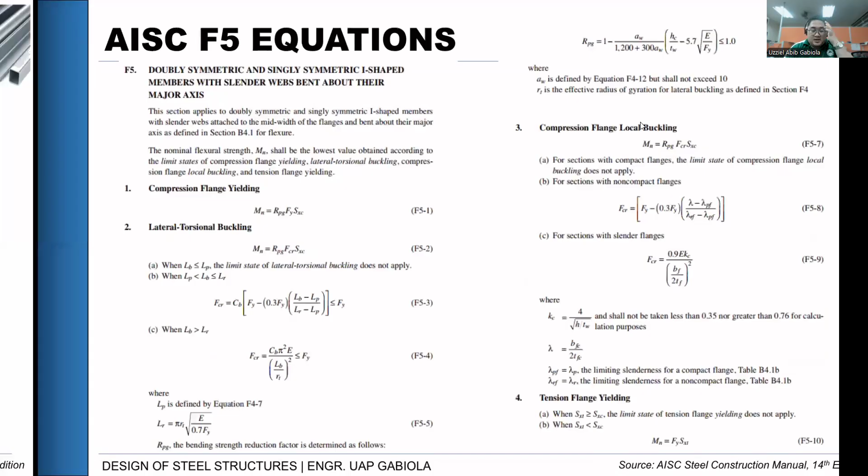When this happens, the code assumes, in the equations we made for F2, F3, and F5, that the moment diagram is constant in value. It means it's not variable - the moment diagram is uniform. For example, if you have a moment diagram, the assumption is it looks like this - straight, which is not the case whenever we have a loading.

For example, if we have a concentrated load at the center, we know the moment diagram is triangular. Or if the loading becomes a uniformly distributed load, we know the moment diagram is a parabola - it's parabolic. So it's not uniform.

So if the moment is not uniform, the beam may have higher buckling strength. To accommodate this increase in buckling strength in the moment capacity, we'll notice that the values in our code have a multiplier here called CB - this is our moment magnifier that we'll use.

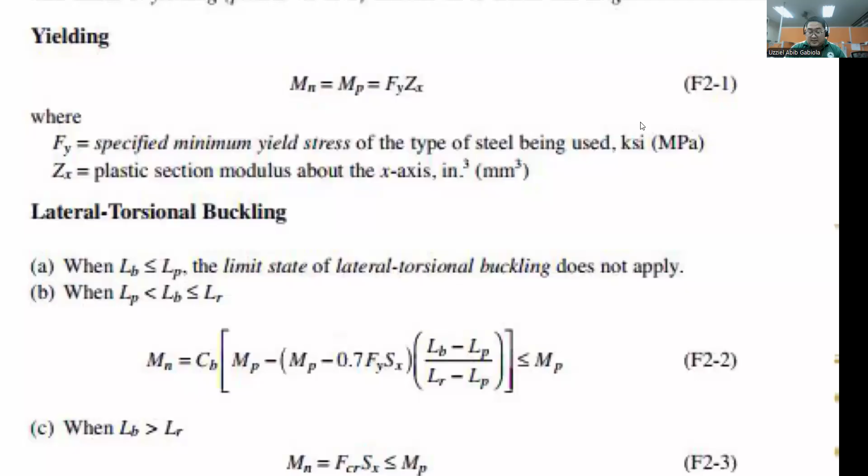So far, in our previous examples, we assumed CB equals 1. But actually, we have to calculate that based on the value of our moment diagram. This is also the value of CB - meaning we amplify our capacity, we increase it.

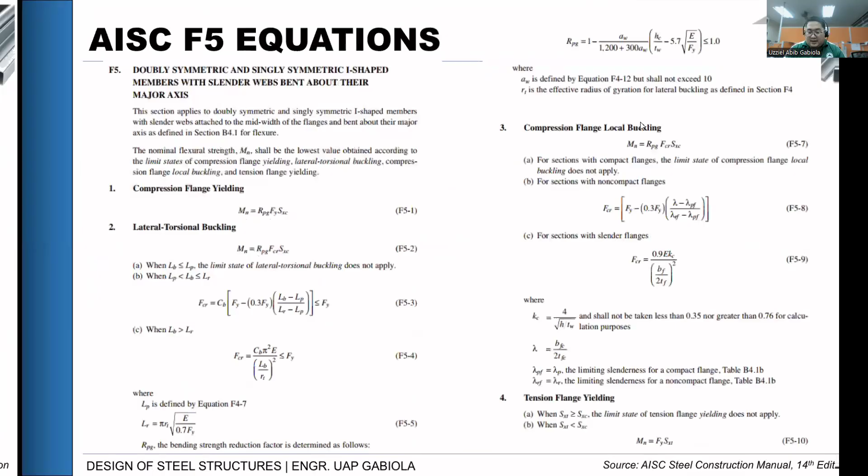So if that is the case, the code says to adjust for moment variation, we use the moment gradient modifier, CB.

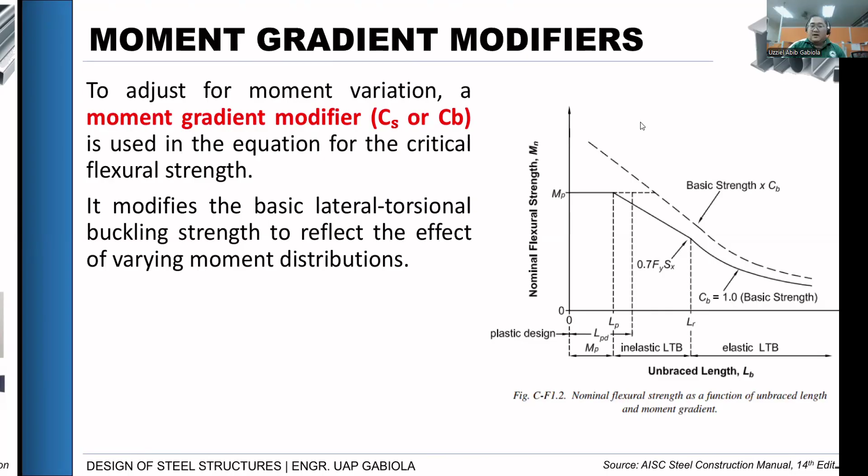Okay, so the equation for critical flexural strength - we modify our basic lateral torsional buckling strength to reflect the effect of varying moment distribution. According to the code, they adapted the formula of Kirby and Nethercot from 1979, which they modified, and this is the formula they used for CB.

So CB equals 12.5 times maximum moment, all over 2.5 times maximum moment plus 3 MA plus 4 MB plus 3 MC. These are our values, wherein MA, MB, and MC are the quarter points of our unbraced length.

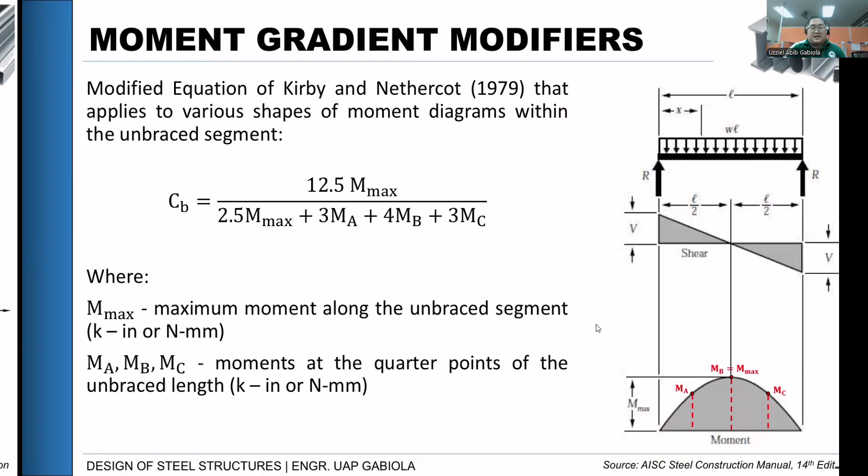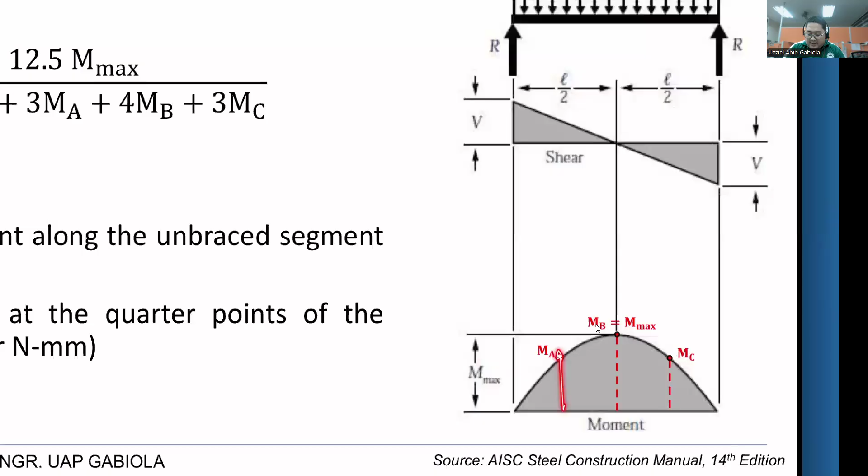So when we say quarter points, let's say this is our beam. Our assumption, for example, is that the bracing is at the support. This means our unbraced length is the full length of the beam. If that's the case, looking at our moment diagram, the positions of MA, MB, and MC are the quarter points - dividing our unbraced length by 4 gives us the points of MA, MB, and MC that we'll use in this equation.

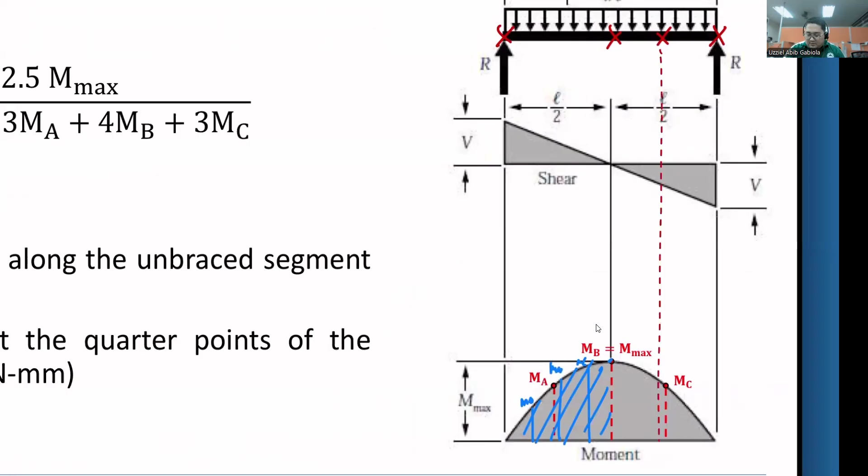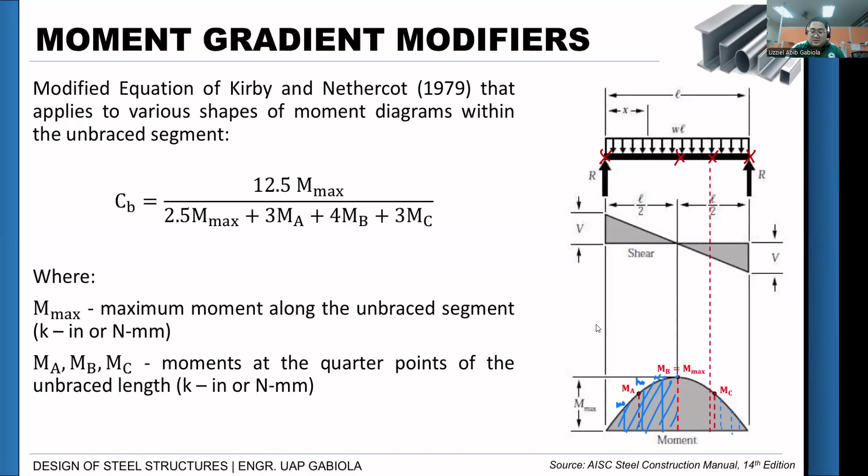So this becomes the new MA, MB, MC, and the maximum is whatever the maximum value is. So it depends on the unbraced length what becomes the position of MA, MB, MC, and the maximum moment, as long as they are the quarter points of our moment diagram.

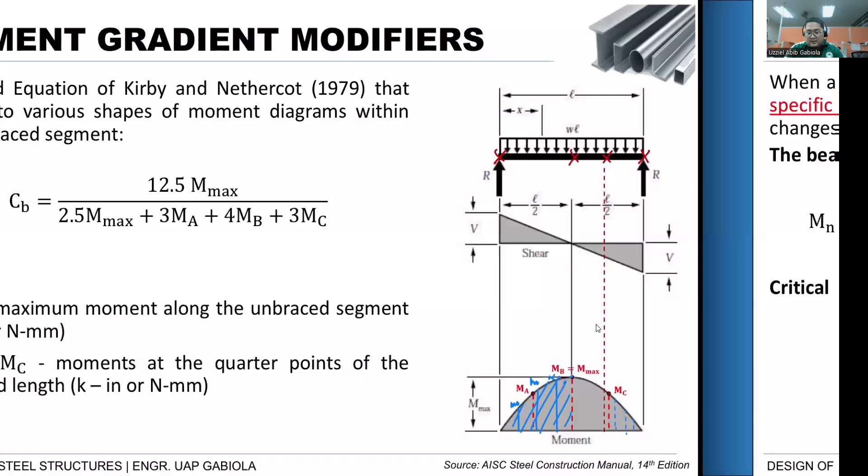Quarter points of the unbraced length that we're looking at in our moment diagram. So when steel beams are discretely braced, it means the bracing is only at certain points - lateral torsional buckling is restricted at specific locations along its length rather than continuously along the entire span.

So now the beam resisting bending changes, and the distribution of stresses along our length changes. For our beam capacity, it depends on our unbraced length. First, our capacity is based on our plastic moment. And second, we compare it with our critical buckling moment - this is the amplifier we discussed, the critical moment that exists in our beam based on our unbraced length.

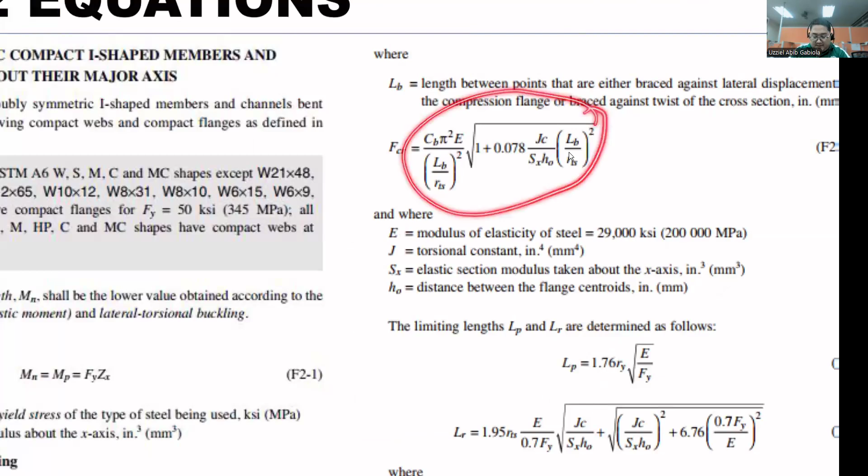Going back to our column discussion, remember when we were dealing with columns, we plotted and looked at the limit of 4.71 square root of E over Fy to know whether our buckling is inelastic or elastic. So for beams, we have something similar to check whether our lateral torsional buckling is inelastic, elastic, or fully plastic.

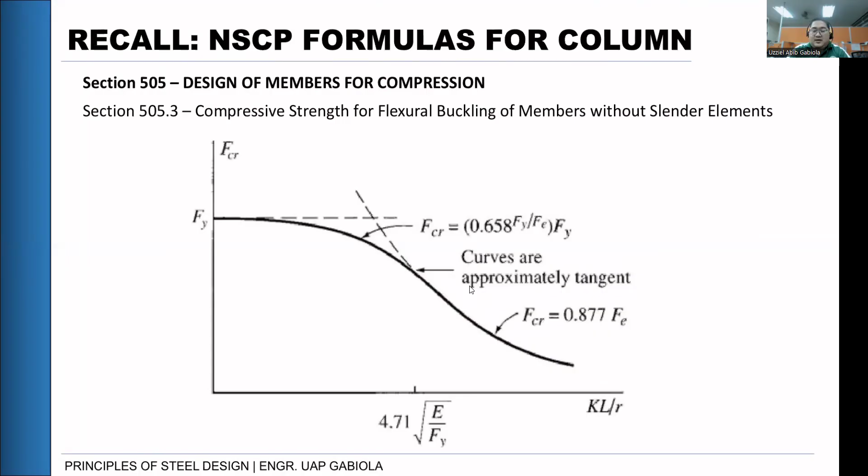Our limit now is divided into three zones - zone 1, zone 2, and zone 3. The limiting points are LP and LR, values that are already in the code. Let's explain our zoning.

For zone 1, when our lateral torsional buckling or unbraced length is less than LP, we're in zone 1, and full plastic moment is our condition - our moment equals our plastic moment.

And then when it's in between LP and LR, we're in zone 2 - inelastic lateral torsional buckling. So the formula depends on the interpolated value between the plastic moment and the critical moment. We have a slope called BF here. We reduce the capacity because we're now within the inelastic range of lateral torsional buckling - meaning it can no longer achieve the plastic moment, MP.

And then we have zone 3, when our unbraced length is greater than LR - this is elastic, and it has its own formula.

So with zone 1, zone 2, and zone 3, we need to determine the value of LP and LR. These are the equations we'll use - already given in the code you have. All we do is substitute values based on table 1-1.

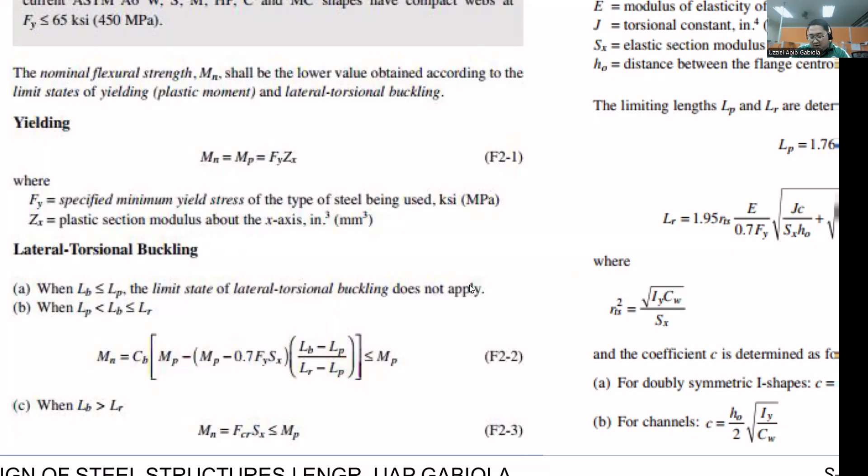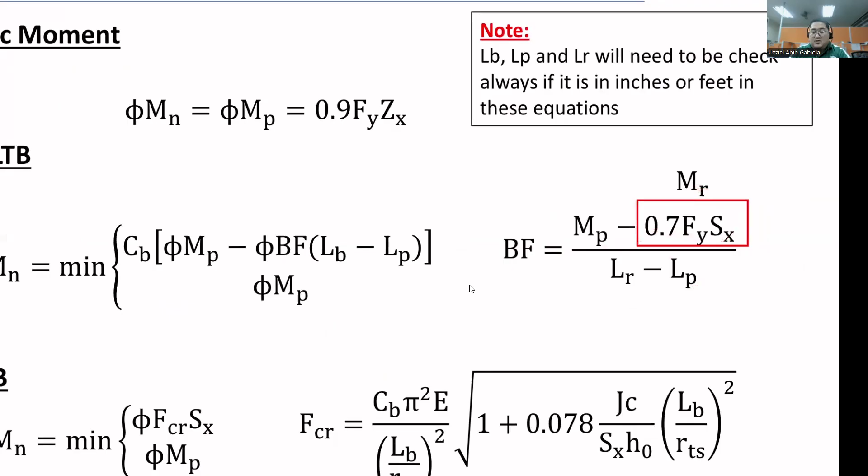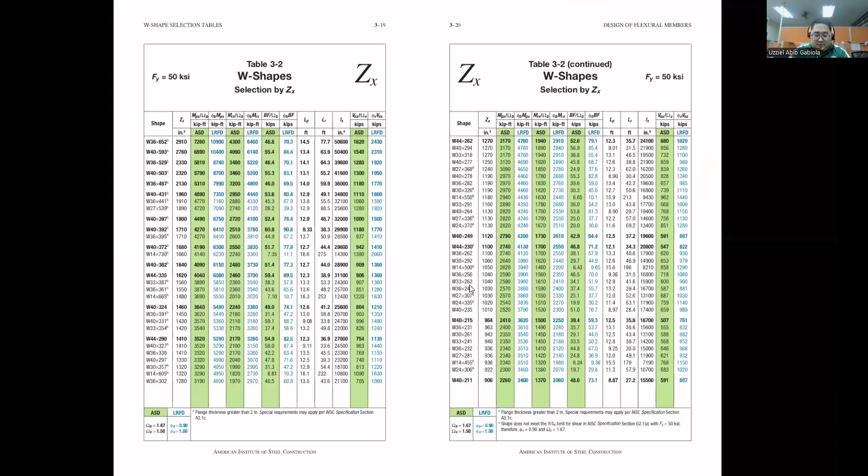Why do we need to introduce this new variable? Because if we check the table we'll use, table 3-2, this table is arranged by ZX for our W-shape section. You'll see the first two values are for moment - this is the value of our moment, and this is the value of MR, which is taken from 0.7 FYSX.

That's MR - that's the value. And this BF here is also that value shown in the table. So if your FY is equal to 50 KSI, we can utilize this table directly - you don't need to calculate everything one by one like before, item by item. It's the same for our LP and LR.

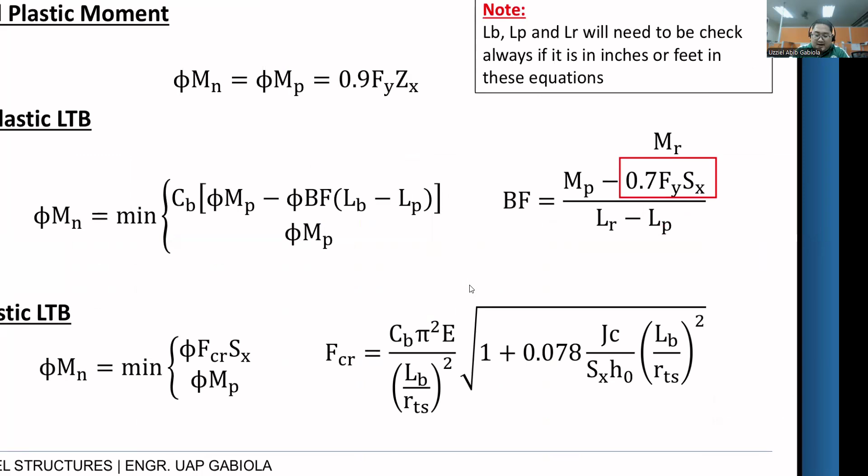Meron din ditong LP and LR. You don't need to calculate it manually, unless sa direction ng exam ay to verify. Pero kung halimbawa wala namang binigay sa exam na you need to calculate manually yung LP and LR, you can use it directly, galing sa table, as long as yung FY mo ay 50 KSI.

So other values of FY, unfortunately, you need to calculate it one by one. Dito makikita mo, meron na din siyang value ng shear, so para doon sa pag-check ng shear capacity ng section, wala ka ng problema din. Kaya sabi ko nga, more or less, yung pagkuha nitong values na to, substitution lang siya ng formula. So, kaya yun yung condition for zone 2.

At then for zone 3, ito naman daw yung equation. phi FCR SX, wherein FCR natin is itong mahabang equation na to, na we can also manually calculate, as long as we know the value of our properties ng section.

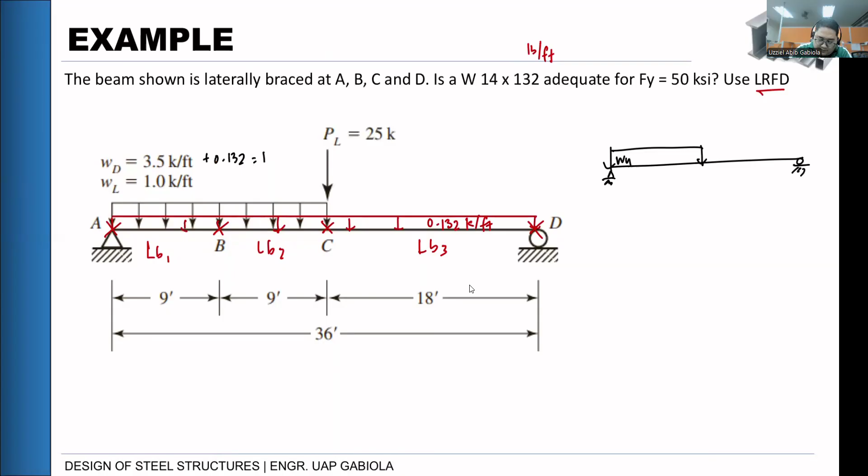And kip per foot, and equals to 3.632 kip per foot na siya. So para makuha natin yung ultimate load, dito, 1.2 times 1.6 lang. Kunin lang natin yun, WU is 1.2 WD plus 1.6 ng WL. So, 1.2 times 3.632, 1.6 times 1, that is 5.9584.

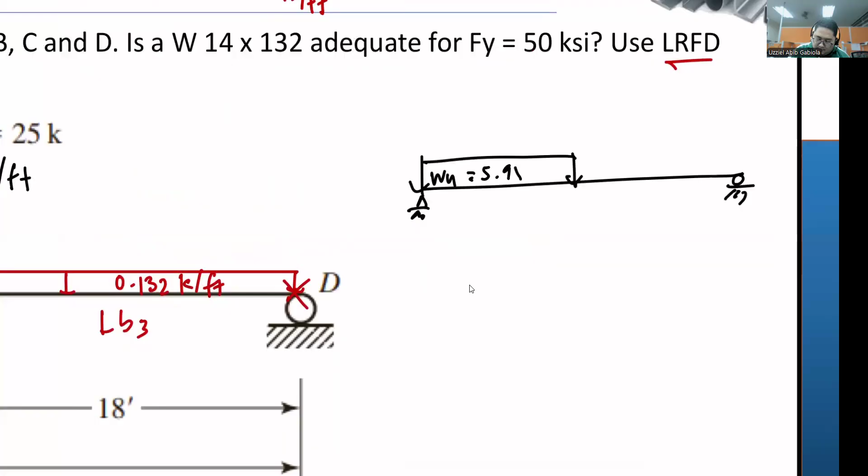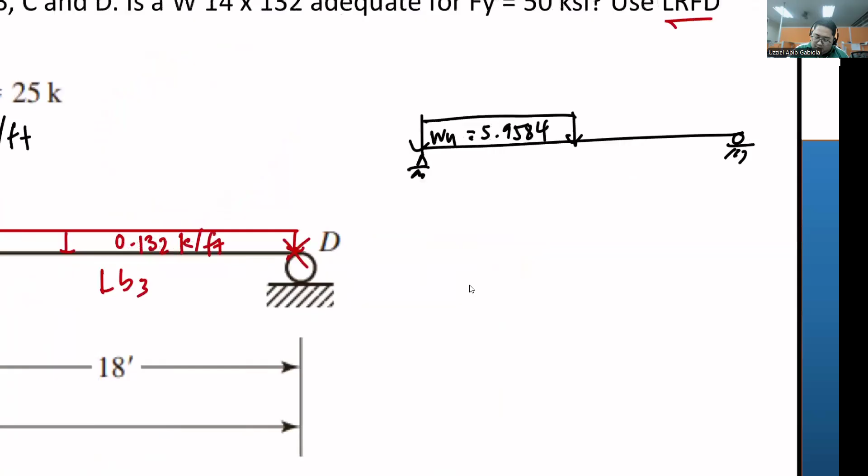Okay, and then we also have here an applied live load na concentrated. So, kung si live load, 1.6 lang yon times 25, so that is 40. Lagay natin dito, 40, meron tayong 40 kips dito. And then, meron tayong remaining na uniformly distributed load dito sa rest ng section natin, which is 0.132. So, lagyan na lang natin dito, 0.132 kip per foot.

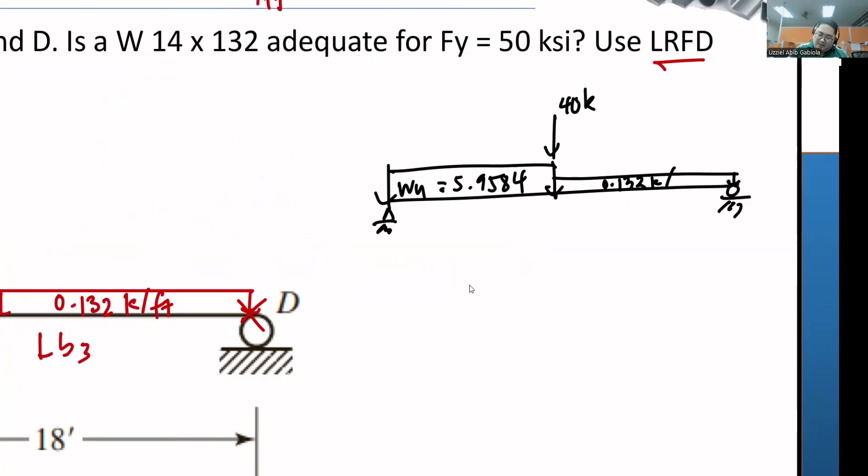Okay, so kailangan i-solve natin ngayon yung ultimate moment natin dito sa beam natin. Since factored na yung loadings natin, we can calculate now the value of our ultimate moment based on LRFD. So first is to get our reaction. This is A, this is D. So RA and RD, okay, so performing...

Ganyan yung bracing natin, lagay ko lang yung mga bracing natin. So this is 9, 9, 18. Una is to change yung ating mga uniform distributed load into its equivalent ECL. So 5.9584 times 18, that is 107.2512 kips. 0.132 times 18, that is 2.376.

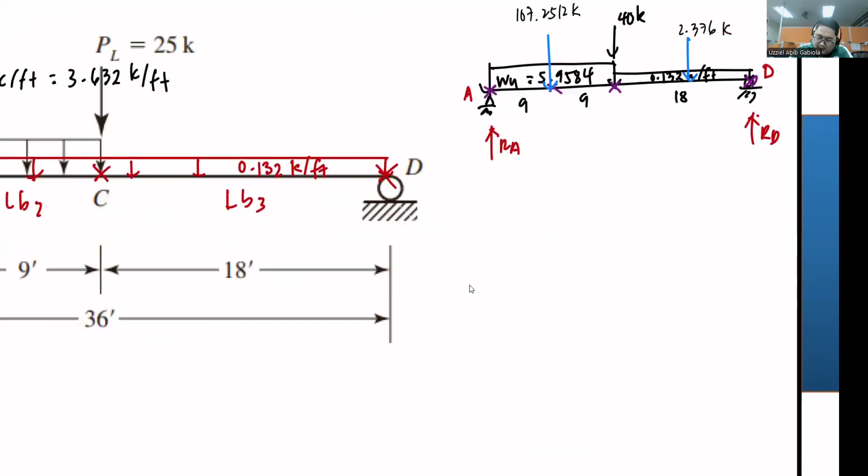Okay, kips. So to get the value of RD, we do this: summation of moment at A is equal to 0. Let's take our table. So these three loadings rotate clockwise, and RD rotates counterclockwise.

So that is 107.2512 times 9, 40 times 18, plus 2.376 times 27, on the other side that is 36 times RD. So in total, we can get RD equals.

107.2512 times 9, 40 times 18, 2.376 times 27, divide by 36, that is 48.5948 kips. Then using summation of forces Y equals 0: all downward forces minus RD gives us RA. That's 107.2512 plus 40 plus 2.376 minus 48, which is 101.0324 kips. That's the value of RD and RA.

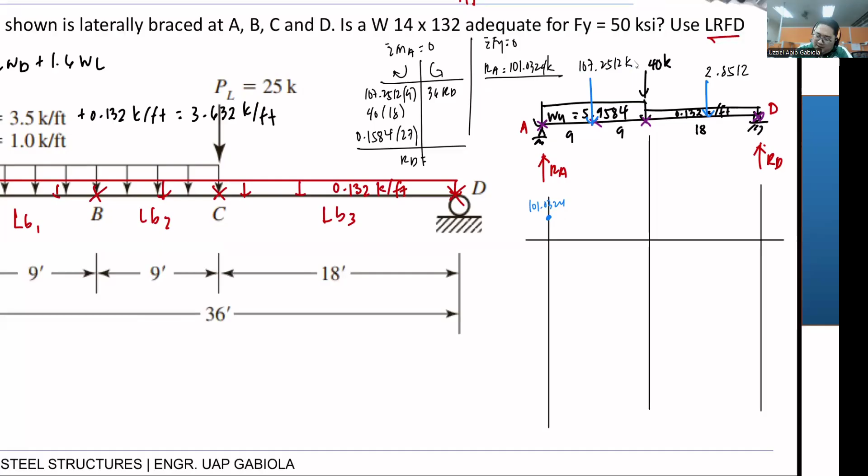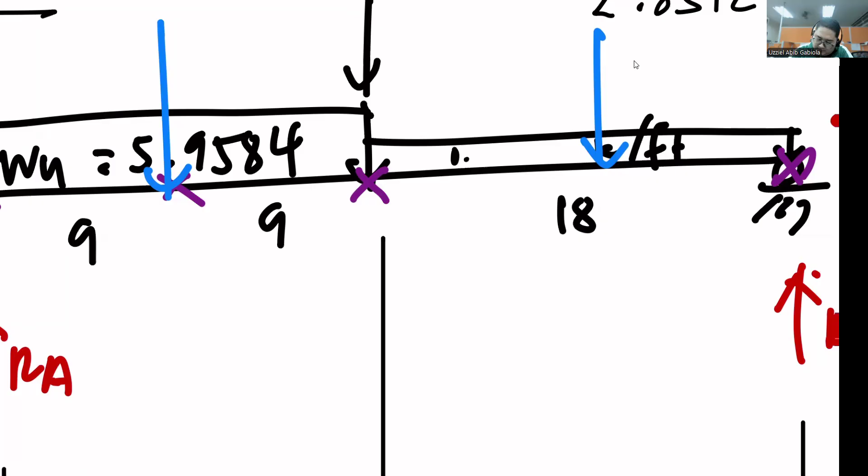So this becomes 2.8512 kips. It won't be 0.132. It's 0.132 times 1.2, equals 0.1584.

So RD: 107.2512 times 9, 40 times 18, 2.8512 times 27, divide by 36, that gives 48.9512. So 107.2512 plus 40 plus 2.8512 minus RD equals 101.1512 K. Let's adjust this too.

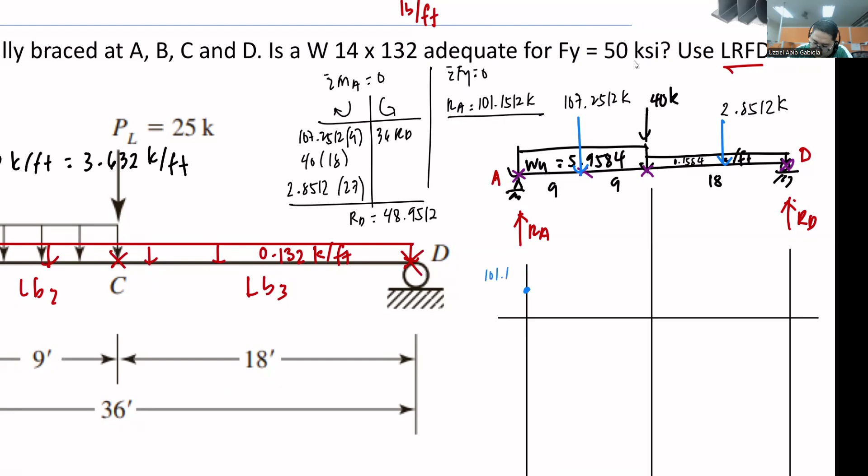That is 101.1512, minus 107.2512, that's negative 6.1. Then there's 40 going down, so our value goes down to negative 46.1. Then there's another uniform distributed load.

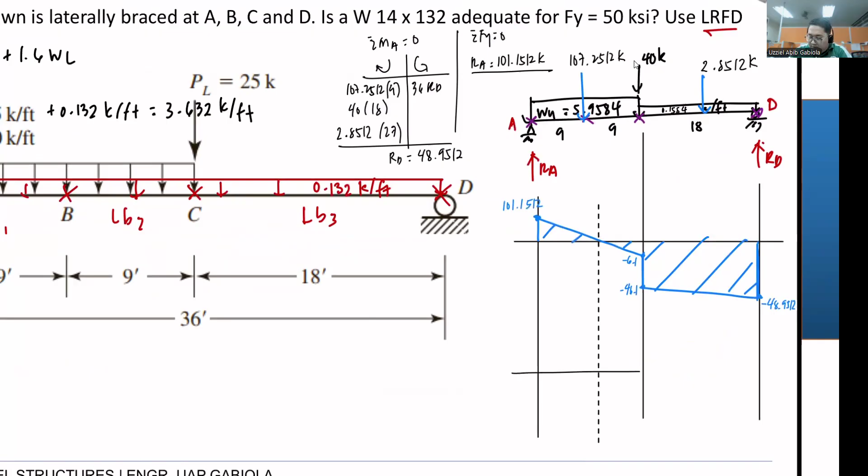From our shear diagram, we can now calculate our moment diagram. Wherever the point of zero shear is, that's usually where our maximum moment is located. So we need to calculate the value of that distance by dividing the intensity by our loading to get that distance, let's call it x.

101.1512 divided by 5.9584, that is 16.976. So the remaining part, we just subtract from 18, giving 1.024. For the moment, just get the area of our shapes.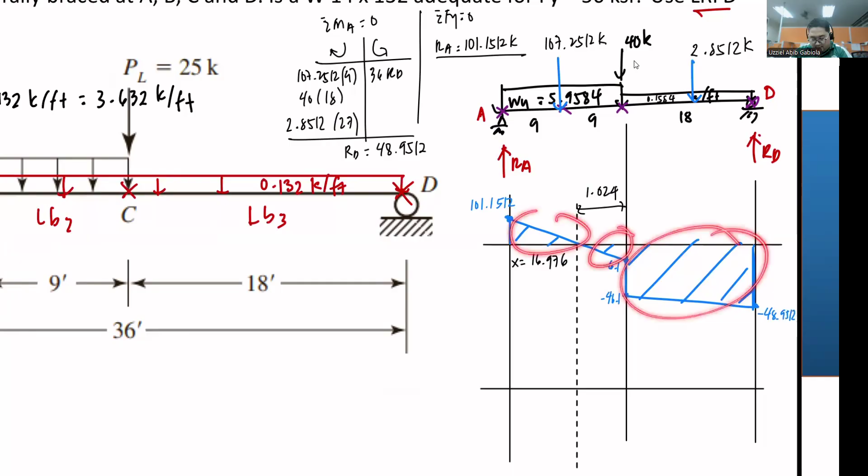We have a triangle and then we have a trapezoidal shape. First, 0.5 of 101.1512 times 16.976, that is 858.571.

And then the bottom triangle: negative 0.5, negative 6.1 times 1.024, is 855.448. Then minus our trapezoid: 0.5 times negative 46.1 plus negative 48.9512, times 18 as the length, that is 0 - well, there's a slight discrepancy but it's basically 0.

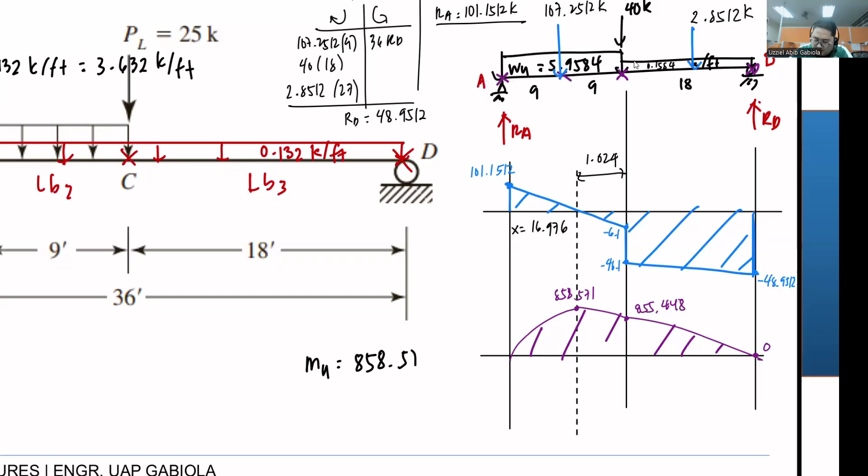So this will be parabolic, this is also parabolic. So this is our moment diagram. And as you can see on the diagram, our maximum moment, MU, is 858.571 kip-ft. That means this is what our section needs to resist - we'll check that later. But so far we've only done structural analysis; we haven't analyzed our section yet.

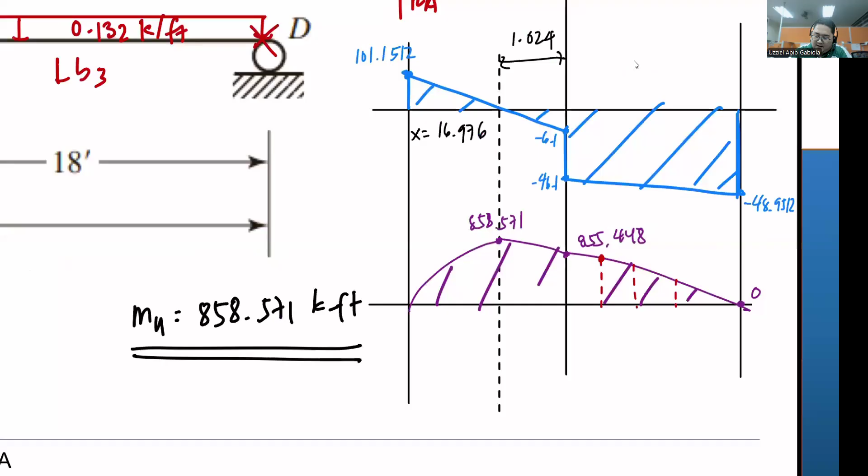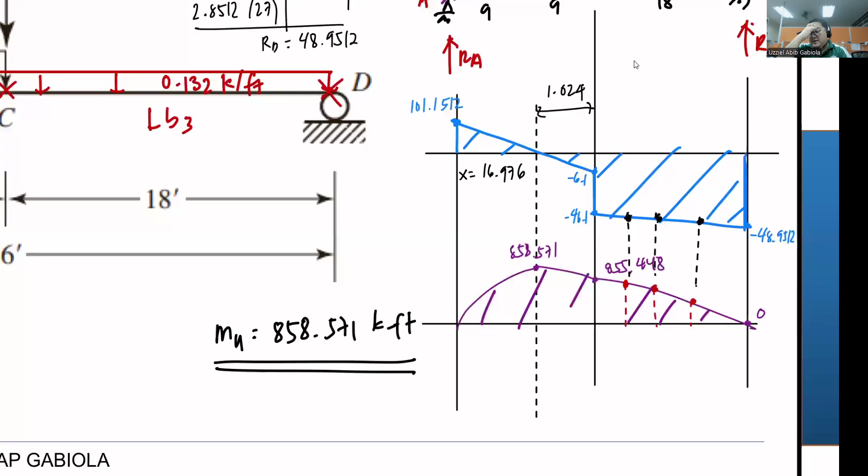So now the question is, how do we get the values of those points? There are several ways. You could get the equivalent points and calculate the value, but that's very tedious since you'd need to do ratio and proportion. So one way is, since we're dealing with a moment diagram - values of moments - and we know the distances, since we divided this segment by 4, this portion can be taken as 18 divided by 4, which is 4.5.

Okay, so pwede sabihin natin, mula sa right support, this is 4.5, this is 9.0, this is 13.5 para makuha natin yung value ng MA, MB, at MC. So okay lang mag-interchange si MA at si MB, MC rather. And ang maximum natin, wala namang ibang malaki diyan kundi yung 855, itong point na ito.

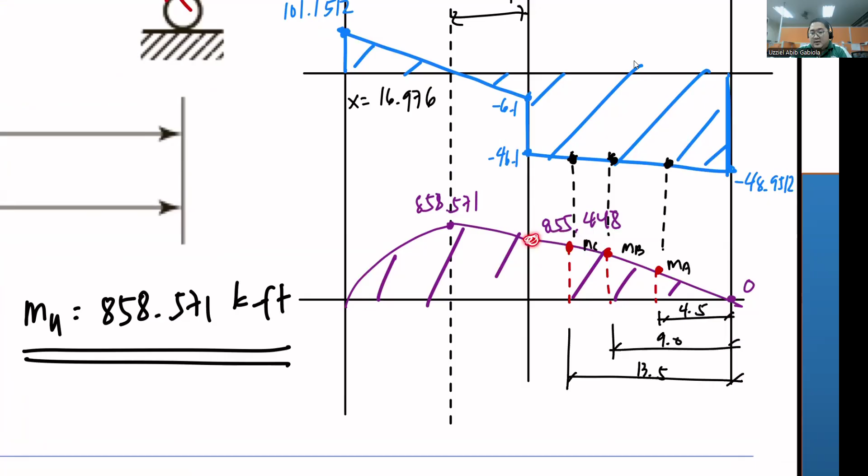So para makuha yon, what we can do is to cut section. Cut tayo ng section, and then isolate natin yung section na yun para ma-expose yung internal forces niya. Kunin natin yung moment function ng segment na yun.

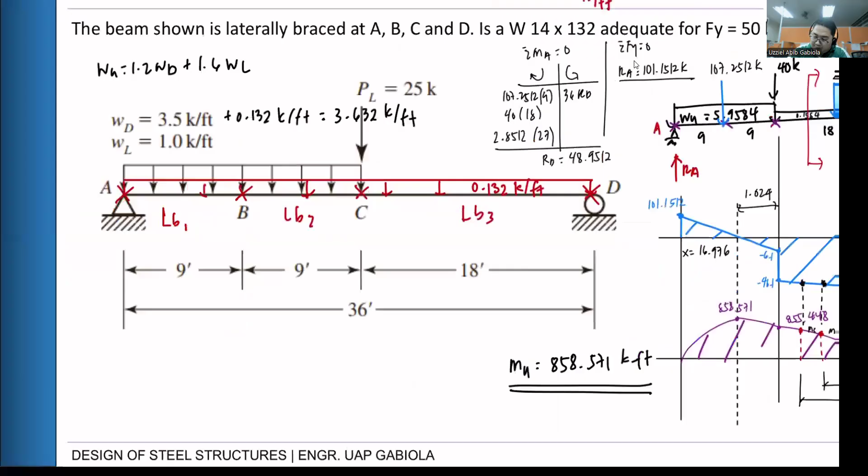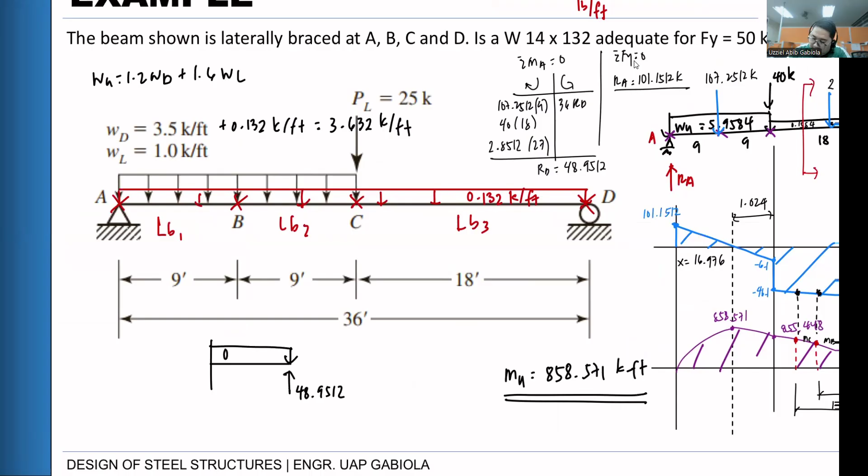Yung segment natin, meron siyang RD na 48.9512. Ito yung ating cut section. Meron siyang uniformly distributed dito na 0.1584. Okay, so ito yung point O, yung cut natin. So referring sa distance from the left end, ito yung distance natin, pwede tawagin ito as X. And kunin natin yung kanyang moment function using that diagram.

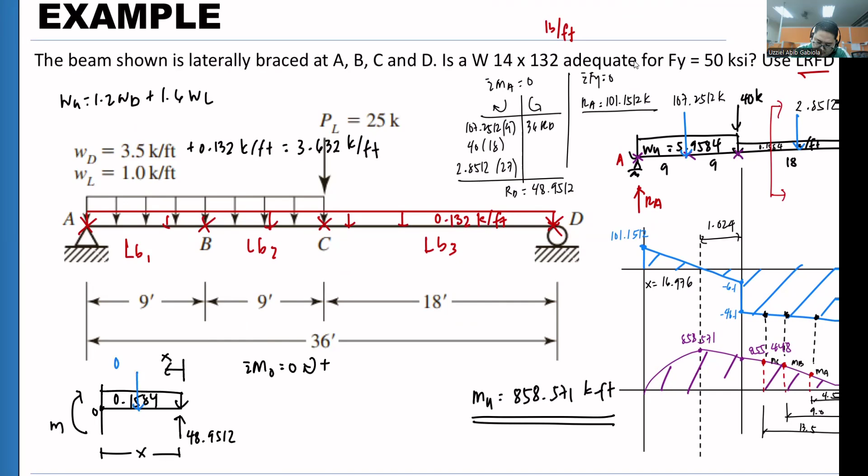Taking summation of moments at O equals 0, taking clockwise as positive. So magro-rotate itong ECL natin. This is 0.1584x. So that is M plus 0.1584x times x over 2, minus 48.9512x equals 0. So yung moment function natin is 48.9512x minus 0.1584x squared over 2.

Itong moment function na ito ay referring sa moment equation na ito. Okay, so kung gusto natin makuha yung mga value ng moments na yun, we can substitute yung 4.5, yung 9, tsaka 13.5 dito sa equation na ito. Okay, so doing that...

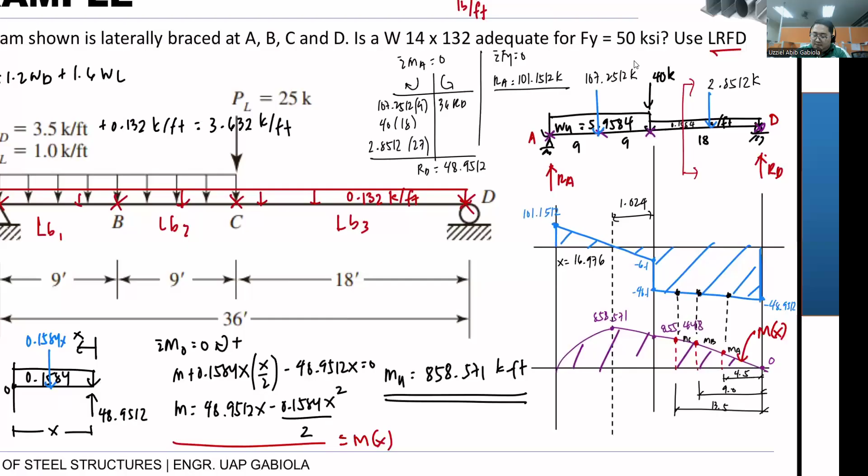Let's proceed sa another sheet. Okay so, using yung ano natin, copy natin ito, moment: 48.9512x minus 0.1584x squared over 2.

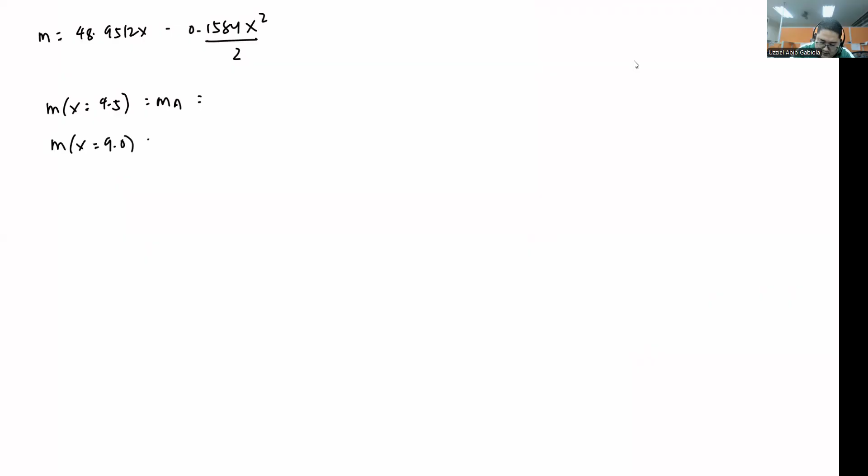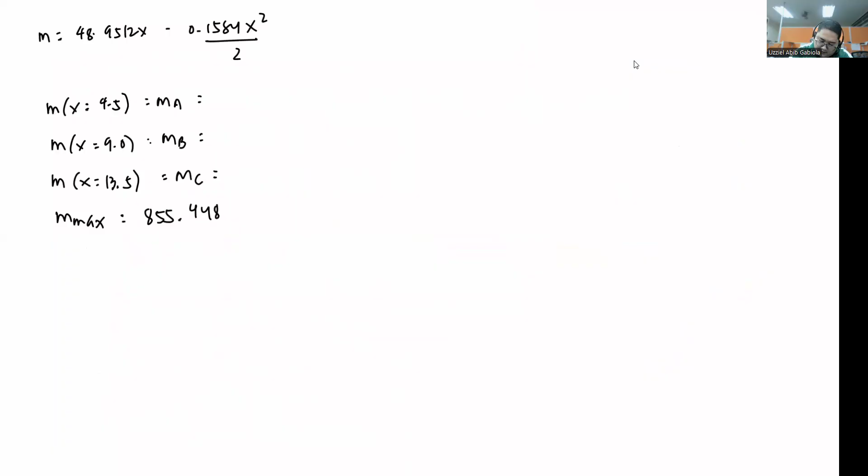So yung moment at x equals 4.5, ito yung MA natin. M at x equals 9, ito yung ating MB. M at x equals 13.5, yan yung ating MC. And then yung maximum moment natin, nandun na yun sa graph, which is 855.448.

Okay, so i-encode niyo lang sa calculator. Input niyo lang, and then sasubstitute natin yung mga values ng x: 48.9512x minus 0.1584x squared over 2.

Solve ng 4.5, that is 218.6766. Solve ng 9, that is 434.1456. Solve ng 13.5, that is 646.407.

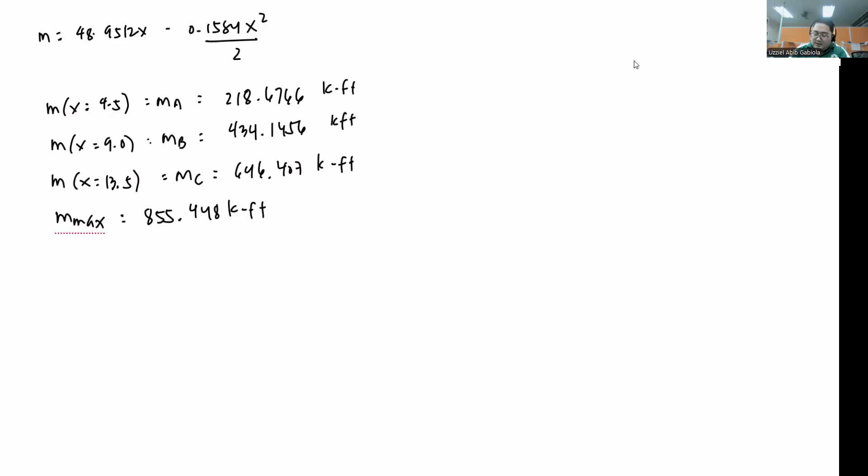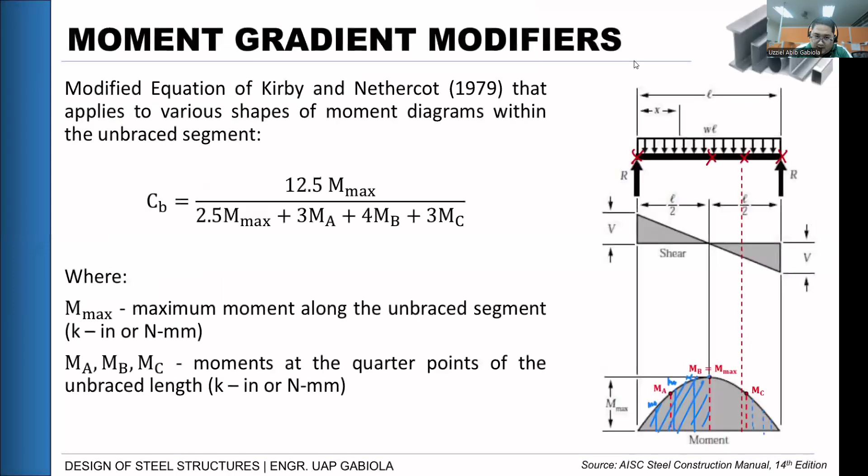So 855.448 plus 3 times 218.676, plus 4 times 434.1456, plus 3 times 646.407.

So CB: 855.448 divided by 2.5, 855.448 plus 3 times 218.6766, plus 4 times 434.1456, plus 3 times 646.407. Answer is 1.653, or roughly 1.65.

So ito po yung answer natin for CB. Yan yung gagamitin nating modifier doon sa equation natin. So CB pa lang po yan. Okay, so yan.

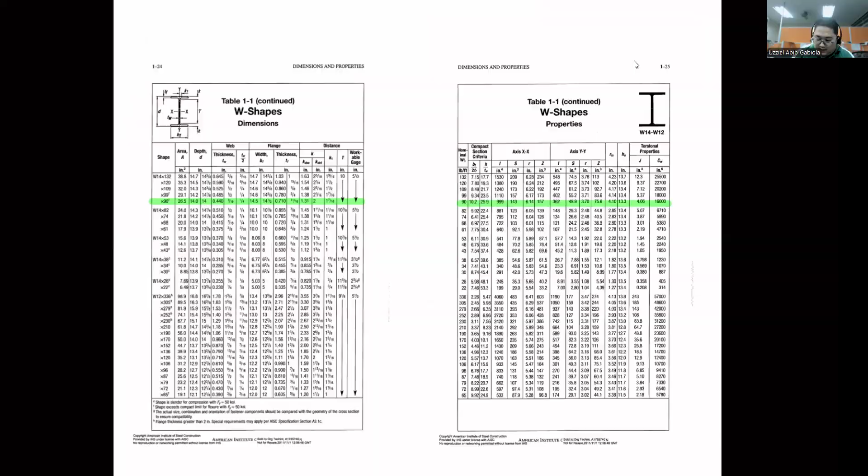So yung BF over 2TF natin. Gawin natin yung conventional muna. Looking at our table 1-1, 14 by 132 tayo. Ayan, so sakto, ito na pala, no? Lagyan lang natin ng highlight yung gagamitin natin. Tsaka ito. Okay, BF, TF muna tayo.

So BF natin is 14.7 tsaka 1.03. Per 2 times 1.03 is equals to 7.136. So H over TW, wherein yung value ng H...

Is actually the distance na ito, no, galing doon sa diagram natin. Ito yung H, so kailangan natin ng value ng depth, tsaka itong portion na ito, yung K design. Okay, so ang formula niya is depth minus 2K design all over TW.

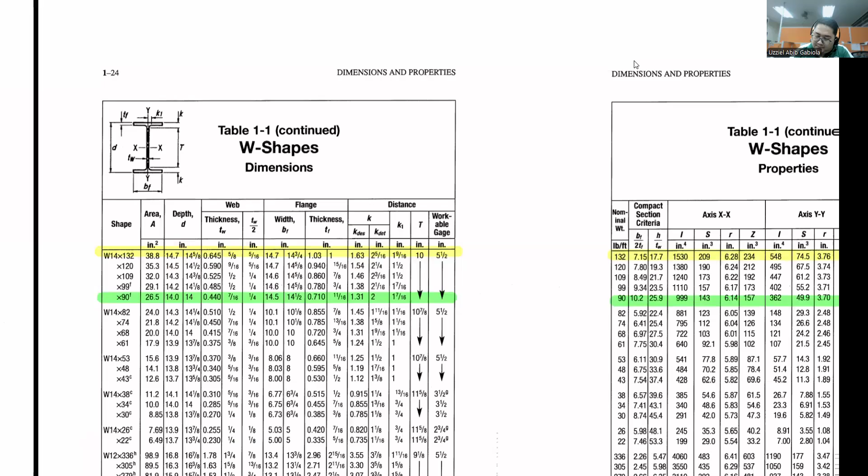So you're looking at the table. Depth natin is 14.7. K design, ito po yun, ano, 1.63. Tapos divide natin ng TW, 0.645. So 14.7 minus 2 times 1.63, divided by 0.645. That is equals to 17.736. Okay, so yan yung ating width to thickness ratio.

And as you can see, may value tayong nakuha, no? So kung check natin ulit yung table 1-1, pag tiningnan niyo, meron po siyang ditong compact section criteria. Actually may value na din tayo ng BF over 2TF, tsaka H over TW. Papansin niyo, 7.15 yung ginamit niya. Ang nakalkula natin, 7.136, so may konting discrepancy.

Ito, 17.7 yung H over TW niya. Yung sa atin is 17.736. Okay, so kung requirement sa problem o sa instruction is to calculate it manually, you have to do it this way. But if not, you can use directly the values that you can see on the table 1-1.

So once you have this, what's our condition now. So we have our flange, our web, okay? And then these are our limits. So if we go back to our values...

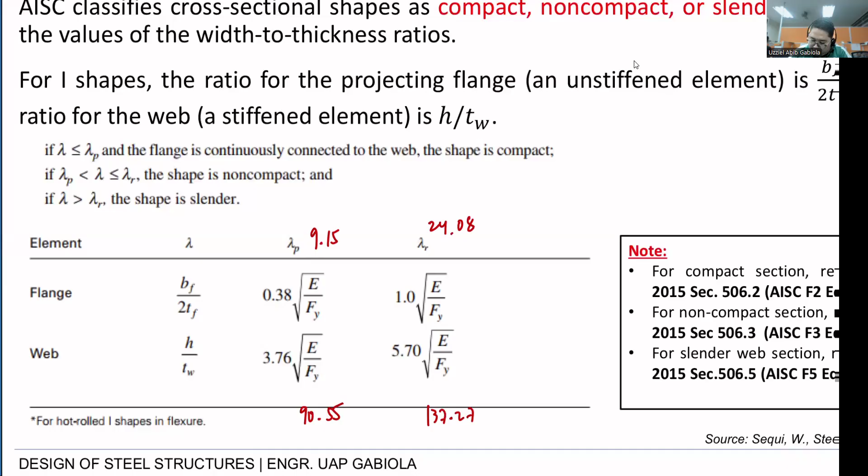Okay, so going back dito: 137.27, 90.55, 24.08, and then 9.15. Okay? So yung sa flange natin, ito yun, 7.136. So below siya, okay, so dito tayo. And then yung sa web is ito, so below ulit siya. So okay, yung ating classification, this is compact, non-compact, tapos is slender.

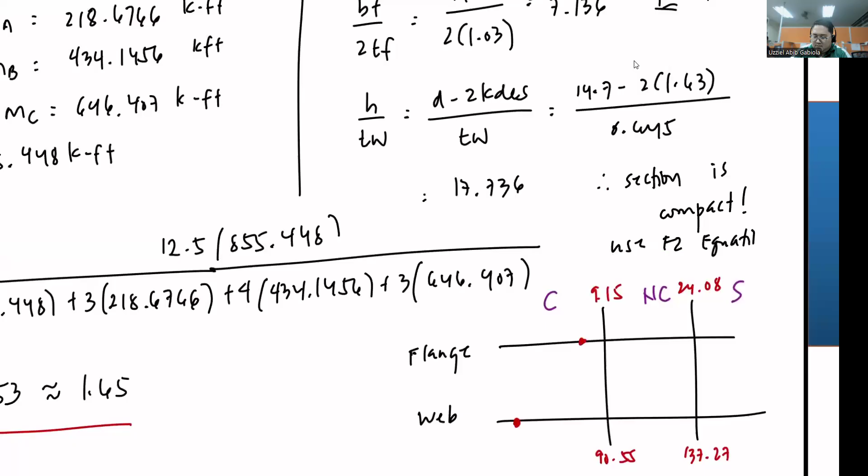Since both flange and web are compact, therefore section is compact. Use F2 equation. Ibig sabihin, balikan natin yung ating code dito. Dito tayo papasok sa F2 equation. Ang requirement ng F2 equation, meron tayong yielding, meron tayong lateral torsional buckling.

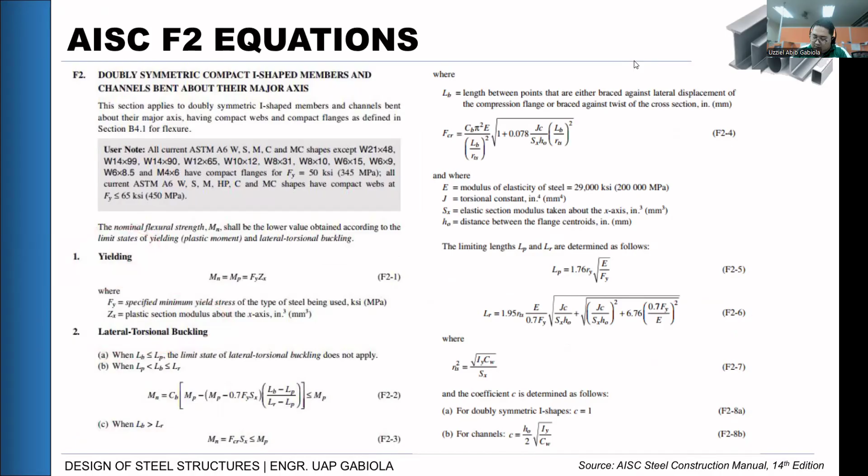So let's continue, compact na yung section natin. Let's proceed. Ang kasunod ngayon is satisfy natin yung condition, yung limit state. Yung una is by yielding. Sabi sa yielding is yung MN natin ay equal sa MP is equals to Fy times Zx. Fy natin is 50 kip per inches squared.

Zx natin kukunin natin sa table 1-1. So Zx is 234 inches cube. At convert natin sa foot, 1 foot is 12 inches. So Mn is 50 times 234 times 1/12, that is 975 kip-feet. Okay, so ito yung true capacity natin by yielding.

Then for B, ito yung sa lateral torsional buckling. We need to compare yung value ng LB natin with LP and LR. Yung LB natin is 18 feet yung ginagamit natin. So si LP and LR, gagamitin po natin yung mahabang formula natin, ito po, to calculate. So let's copy this one and show how this is used.

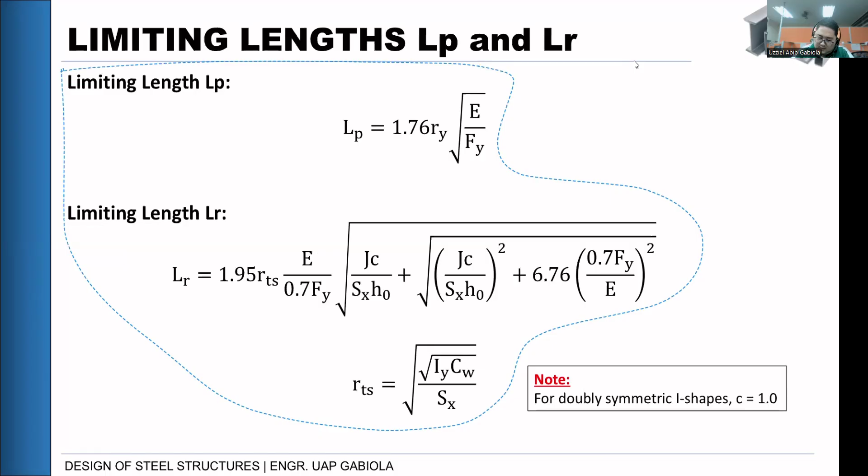So start tayo muna sa LP. LP is much easier, no? So LP is equals to 1.76 Ry square root of E over Fy. Ry natin dito is 3.76. So 3.76 square root of 29,000 over 50. LP is 159.373 inches po ang unit natin dito.

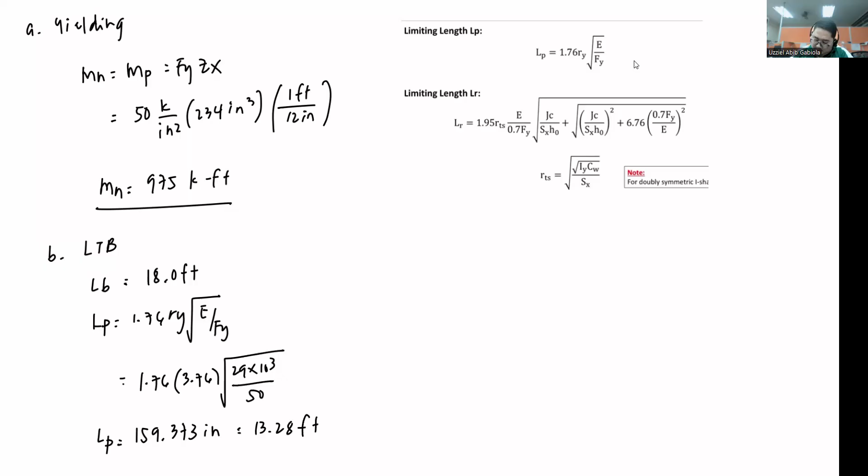Okay, so para gawing feet, divide natin ng 12, that is 13.28 feet. Okay, next is yung ating LR. For LR, let's get yung value. So kailangan daw muna natin ng RTS. RTS muna unahin natin. RTS is equals to square root of square root ng IY tsaka CW.

IY natin is 548, CW is 25,500. Square root noon divided by yung SX. SX natin is 209. Okay, so that is 548, 25,500 divide 209, that is...

4.229. Pero since our equation dito contains 1.95 RTS, gagawin natin, i-store natin siya as letter A sa calcu natin, times 1.95, that is 8.247, store natin sa letter A. Next, we have yung E over 0.7 Fy, store natin sa letter B. That is 29,000, 0.7 times 50, that is 828.571, store sa letter B.

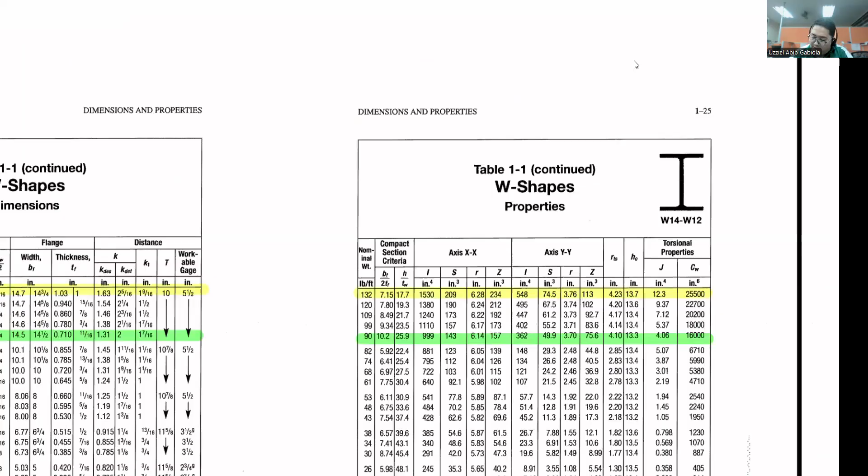Okay, next is yung JC over SX HO, store natin sa letter C. Yung JC, J natin dito is 12.3, times 1.0 for I shape. SX natin is 209, HO is 13.7. 12.3 times 1, 209, 13.7, that is yung ating letter C, 4.296 times 10 to the negative 3.

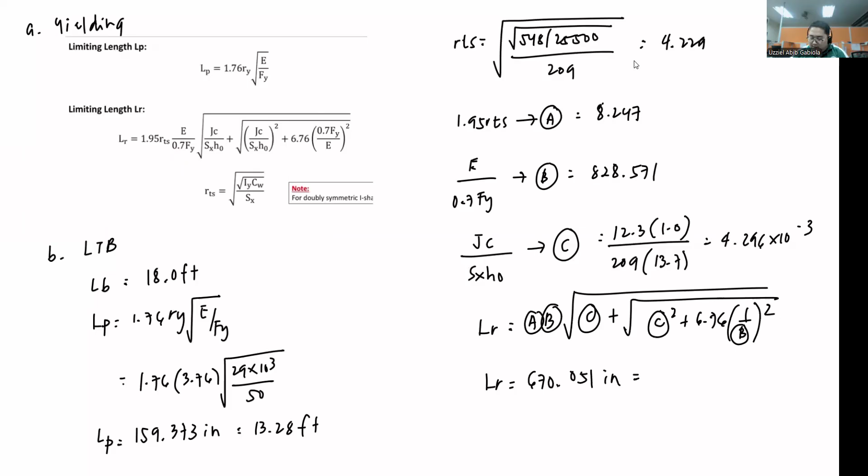Okay, after that, pwede na natin i-calculate si LR using yung ating substitutions: A, B, square root of C plus square root of C squared plus 6.76, then 1 over B squared. So ang LR, upon calculating, square root of C squared plus 6.76, 1 over B squared, is 670.051 inch, or in foot, divide lang ng 12, that is 55.838 feet.

Okay, so ito yung values ng LR, LP, at LB natin. Saan tayo magpo-fall under? Since si LP is 13.28, less than siya sa LB, at si LB is less than sa LR, it means na therefore LP less than LB less than LR tayo, which is zone 2 tayo. Kung zone 2 tayo, ito yung zoning natin, ito yung kailangan nating formula for moment natin. Zone 2. Ayan, so ito yung formulas natin.

So ang wala pa tayo is yung BF, that is equals to MP minus 0.7 Fy Sx all over LR minus LP. Si MP, calculate na natin 975 previously, ito yun, MN, MP is the same. LP at LR: LP is 13.28, tapos LR, 55.838.